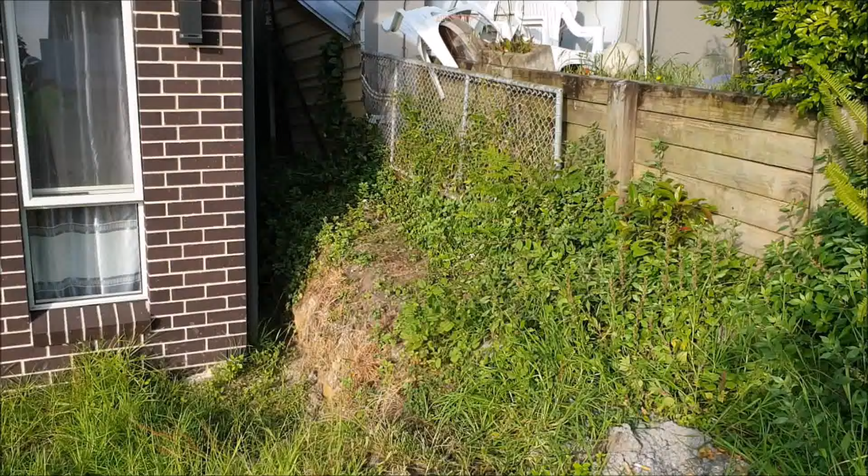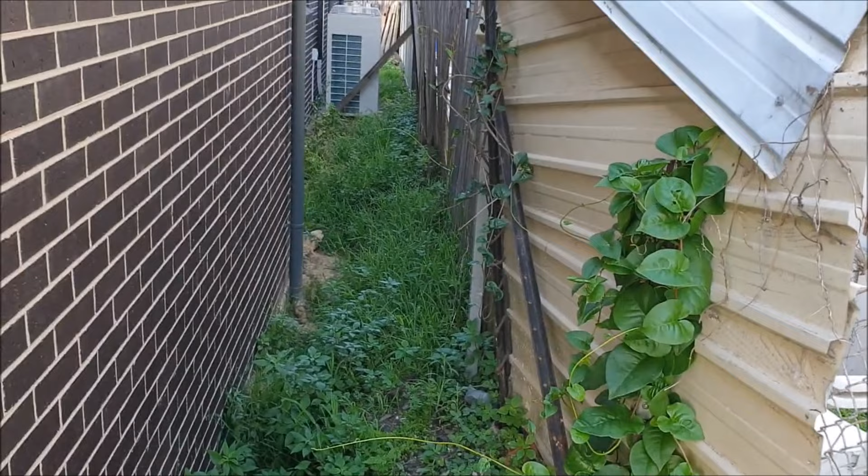Good morning, guys. Today I want to show you how we build Besser blocks, a concrete block retaining wall in that area. We need to excavate this part and move the soil, and the wall is 400 from the boundary to the house to stop the soil from the neighbor's house. This house is lower than the neighbor's, and we need to retain the soil behind the retaining wall. The retaining wall will start from 4 course in that area, then step down to 3, 2 and 1 at the end.

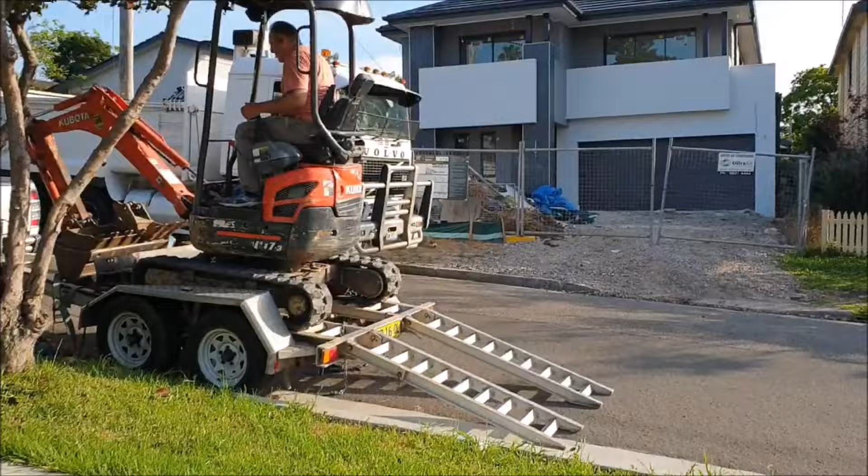First job, cleaning and excavation. We bring the small excavator, which can access the side of the house, and then we dig and excavate the footing, and check it with the laser level following the plan. I'll show you how we fix it and build it.

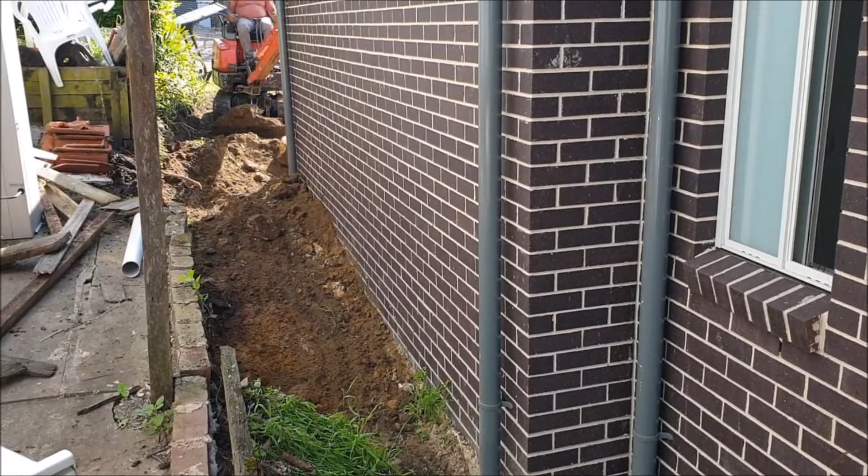So we're removing the existing fence. The old timber fence is all damaged. We remove that, and also continue excavating along the boundary line. I'll show you the plan for the footing. We have to follow the plan because the council certifier comes to check, in the next step, how we fix the steel work for the concrete and how the footing is. If he's okay with the plan, we continue to put the concrete on top.

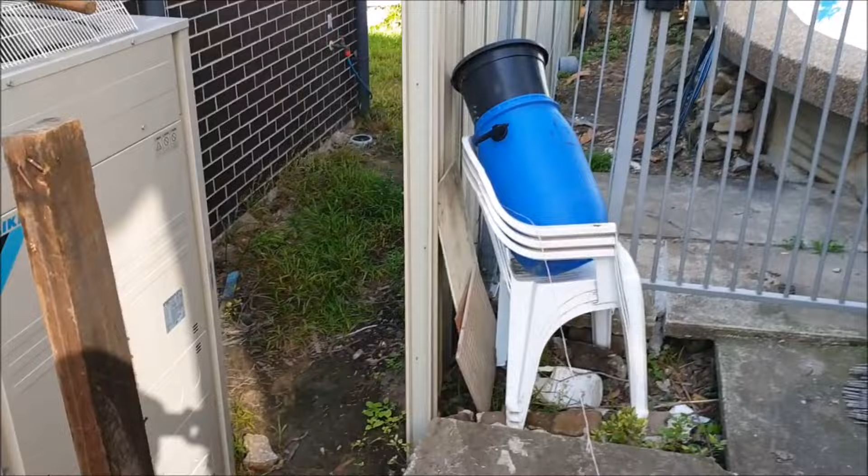This is the excavation part.

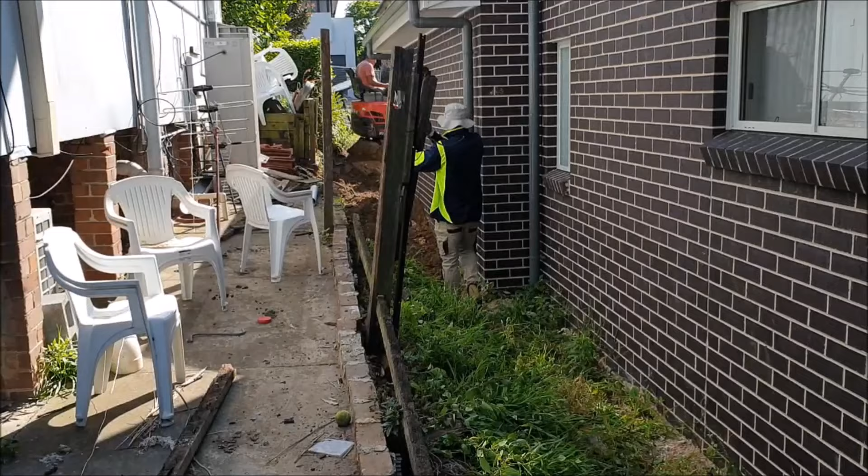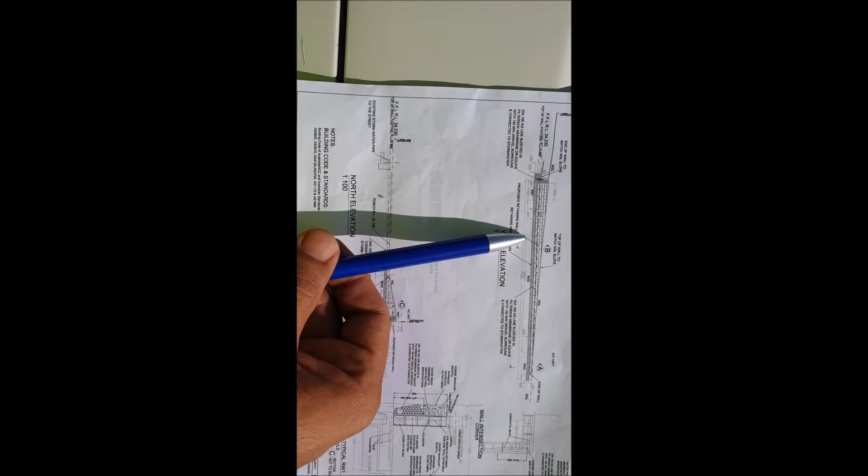So as you can see on the plan, this is the retaining wall: 1.7 meters, that's 4 course, then 1.28 meters, that's 3 course, and then 1 course at the end, the whole 17 meters long.

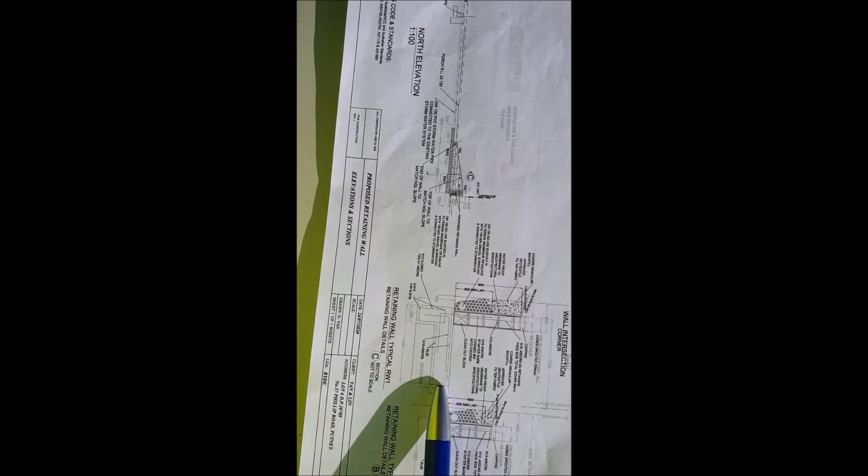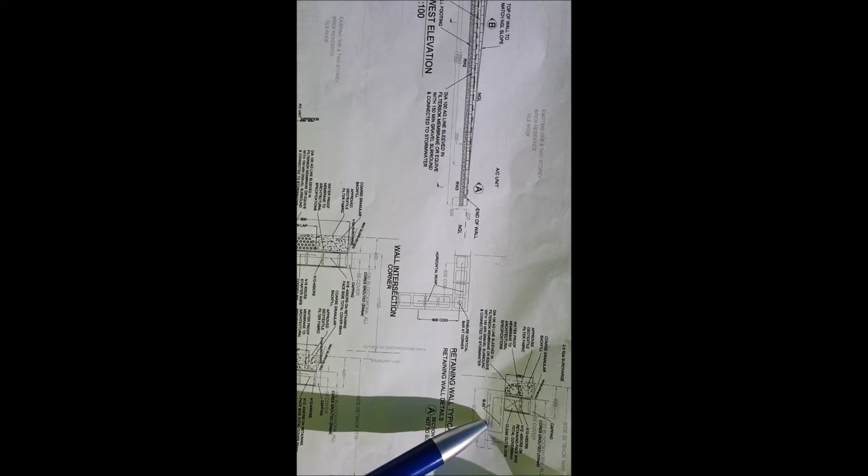We try to follow the detail of the wall. This is an engineering detail for the retaining wall, and we have to follow the exact details of this.

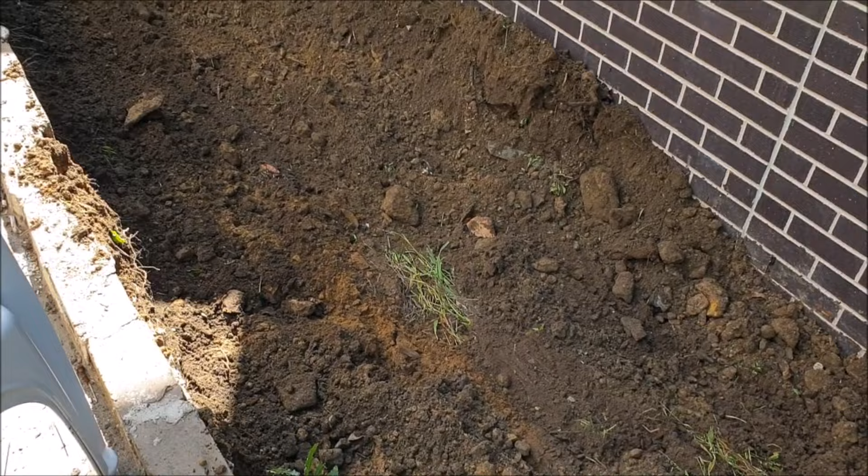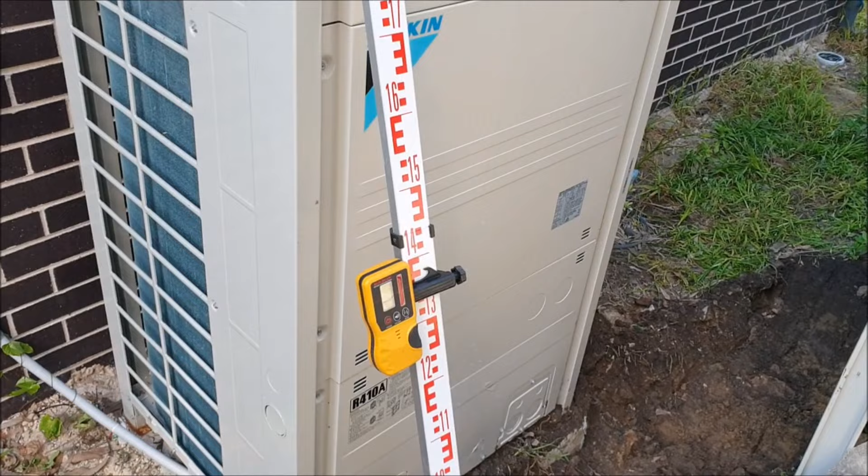So we excavate the existing soil, and now we're setting the footing, and we check the level of the concrete and the footing with the laser level. We set the laser level, as you can see it's rotary and shows the level by the laser.

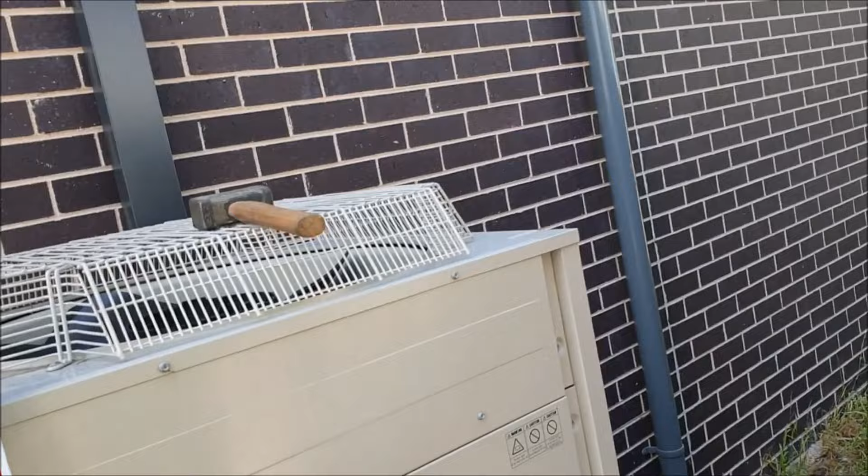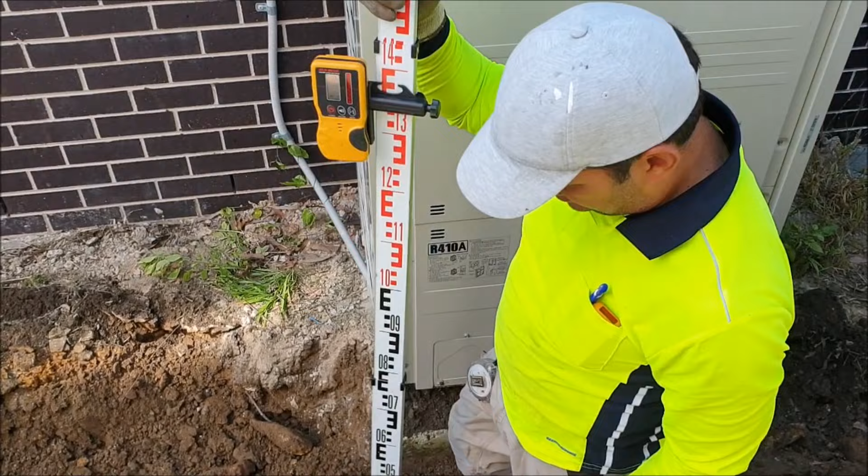Now Tom will help show you how it works. We set the level and turn it on. Now this is the dip - if you can see the arrow, it's going down. And now this is the level of the footing, you can see it's showing there.

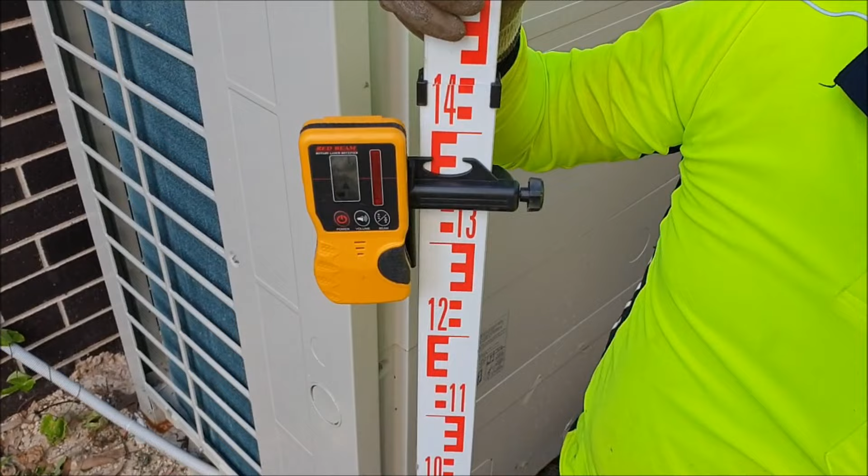We have to follow that with the excavator all through the footing. We check every point while the excavator is working, and that gives us a perfect result at the finished excavation. Yeah, that's good, and we have to follow that.

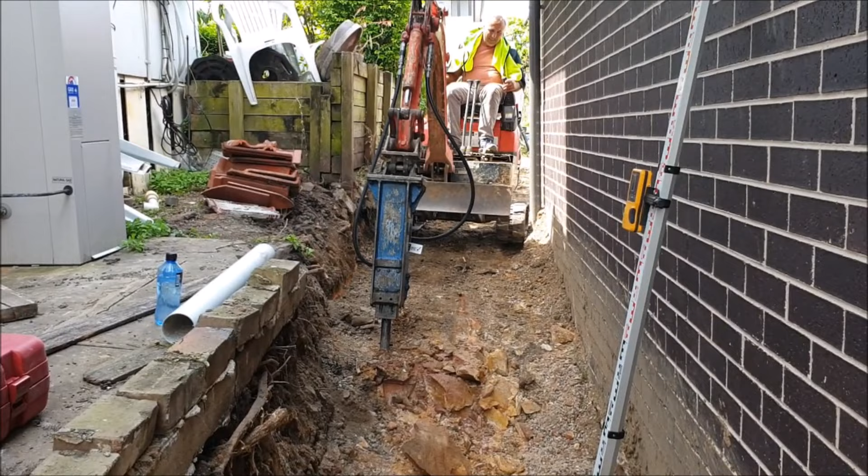Remove the soil, then check it, verify the laser level. Now we find rock in the footing area, and we have to verify with the rock hammer, attach it to the excavator, and hammer the rock for the worker.

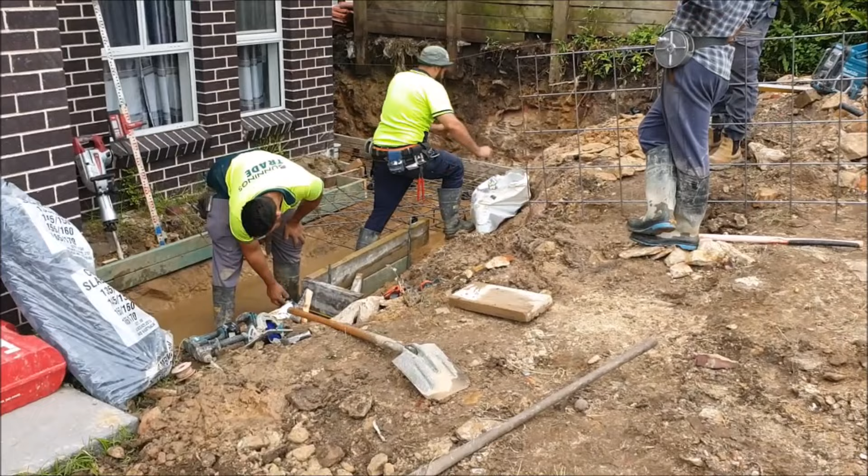So today we're coming to fix the formwork and steel works, to set it up.

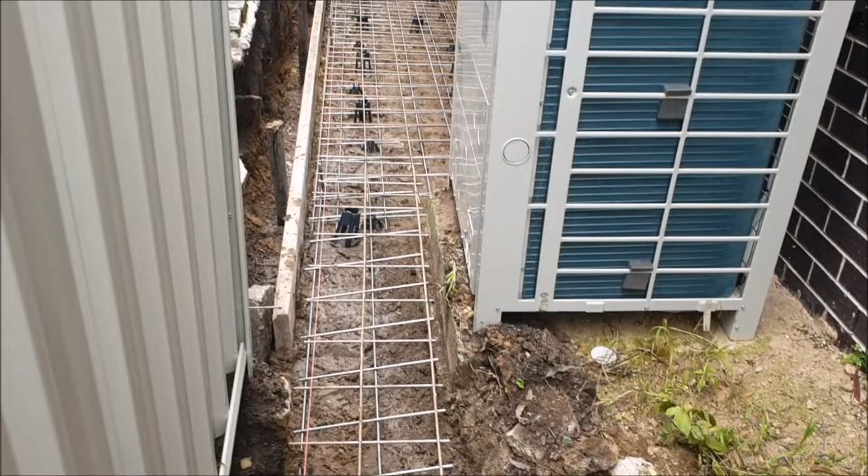So now we set the line to fix the steel bar for the blocks. As you can see, the steel mesh sits on the plastic chair, on the side at the level, and then I'm going there to show you how that was done.

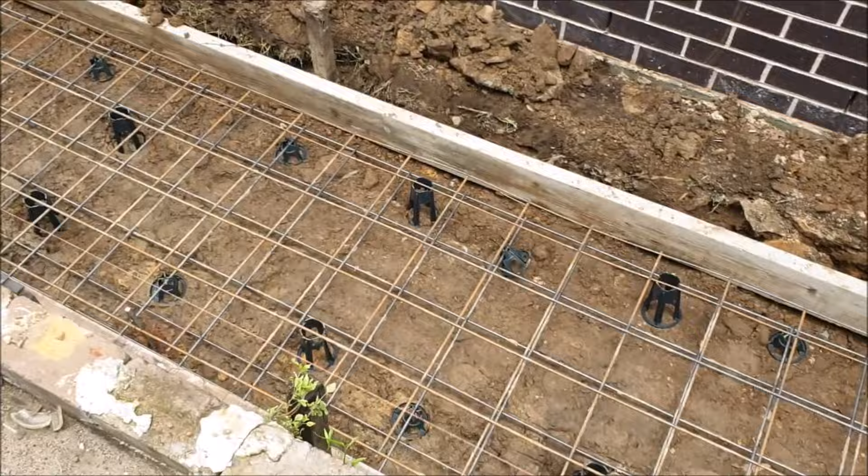This is a two-layer mesh, as the detail shows. The small chair on the bottom and the big one on top. This is a long one and this is a small one, because it's two layers of chairs sitting on top of each other, as shown in the detail.

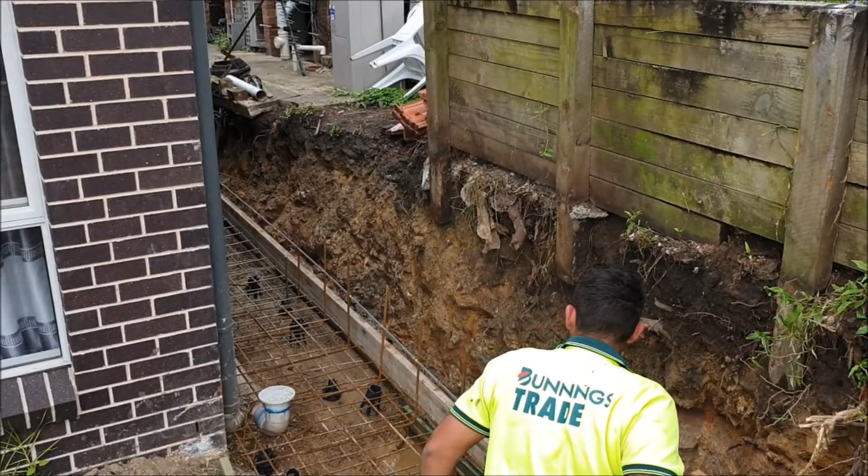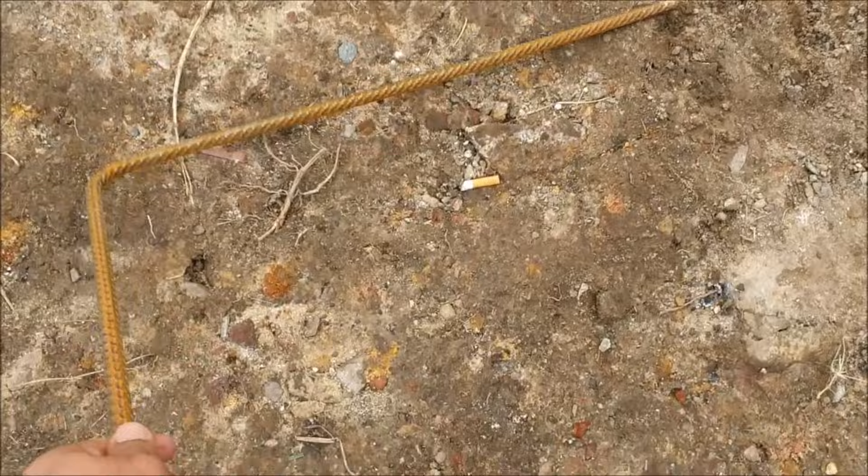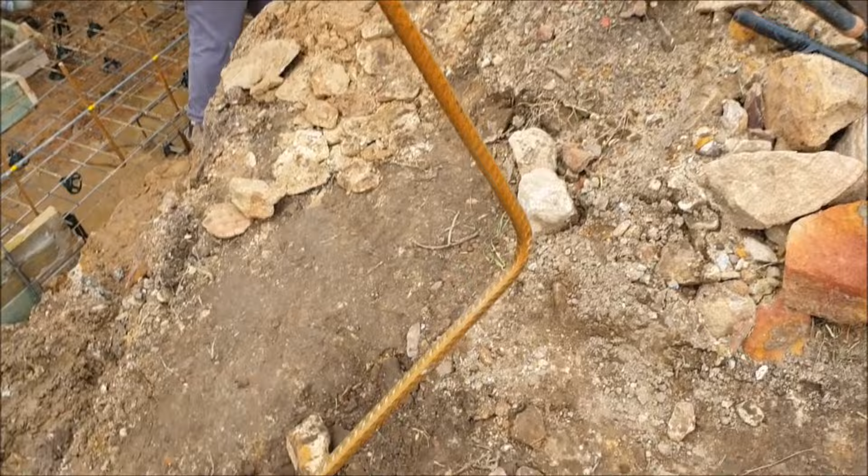Okay, now it's setting the starter bar. This is the shape of the starter bar, N12 steel bar, folded 500 by 500, then connected to the mesh. Then he ties it to the mesh.

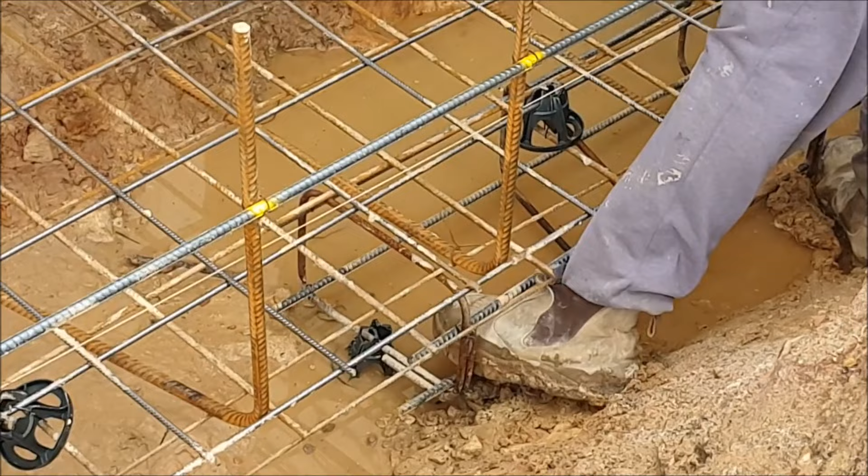Taking a video for next time? No, I'm taking a video. Take a video for YouTube. Yeah, that's it.

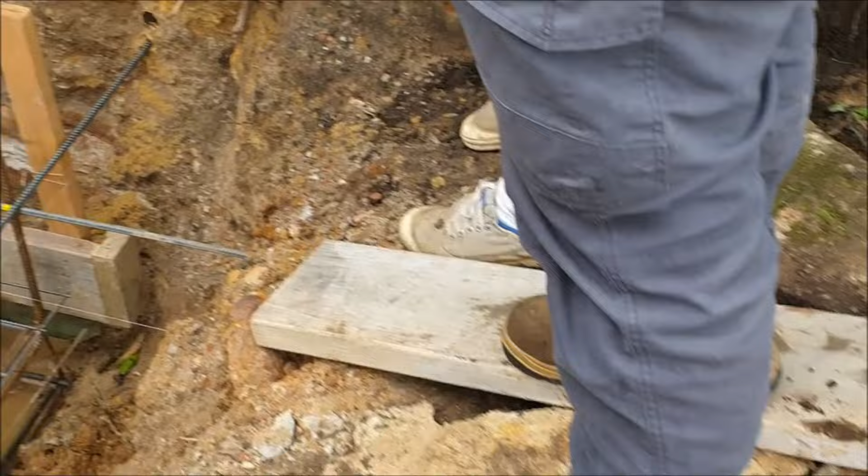See Tom, I told you we can do this. YouTube? You doing YouTube last night, we watched the video, our video? Oh yeah, yeah, you're all right.

So as you can see, the starter bar, actually that's 600 by 600, tied to the bottom mesh, and all in the line, in the angle.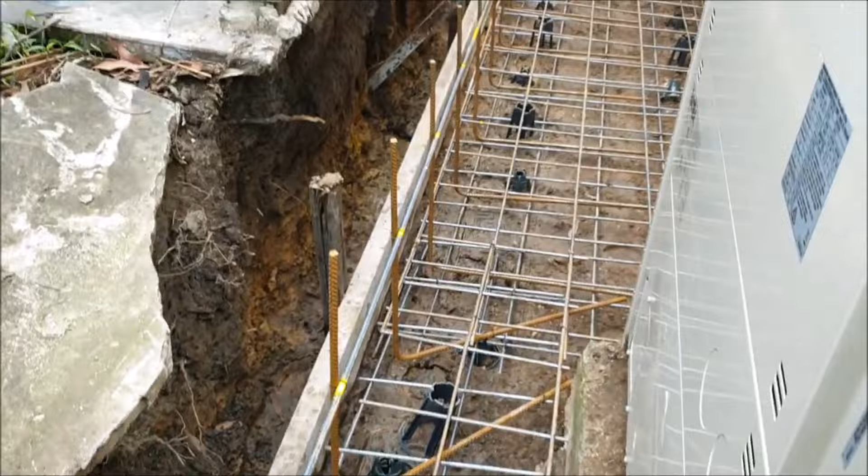And that's the tied wire, how they did it, it goes all through to the end. And the board stops the soil. Tonight it's rainy, so we start to stop the soil from the side, not coming into the formwork.

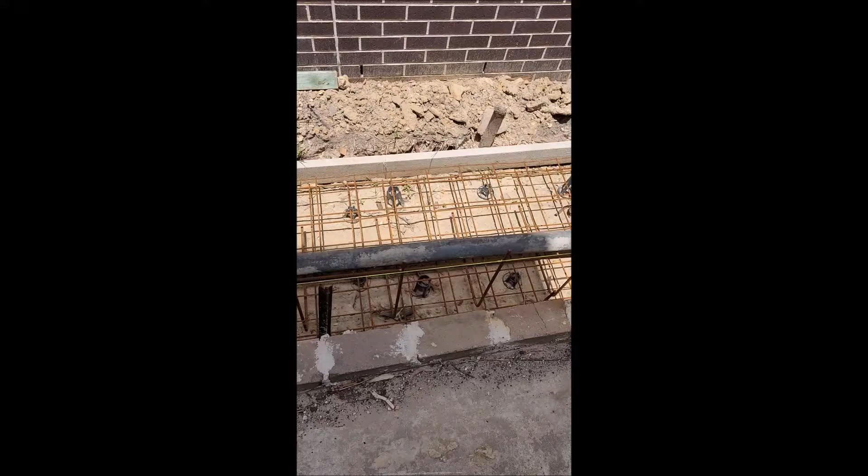So guys, today it's concrete time. For this job we ordered the pump. We need to pump the concrete from the street through the pipe, coming up to there. First we set up the pump and the pipe.

We start from the end, and then we lay concrete for the footing. And I'll show you how it's attached to the mixer by the pump and coming to there.

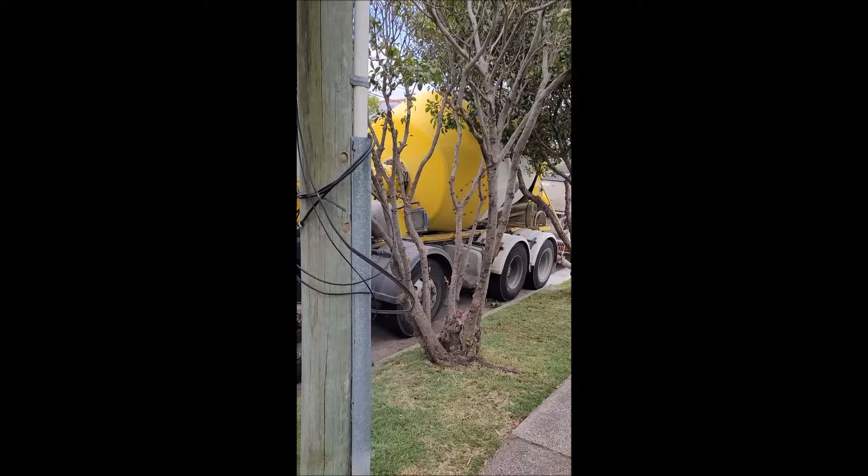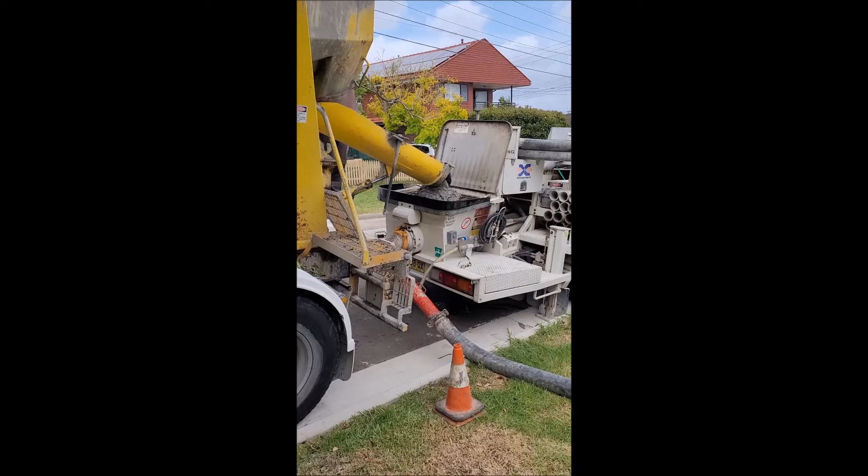So trucks coming, the mixer, bring 5.2 cube of concrete, put it to the pump, and then we'll pump it by the pipe through the job.

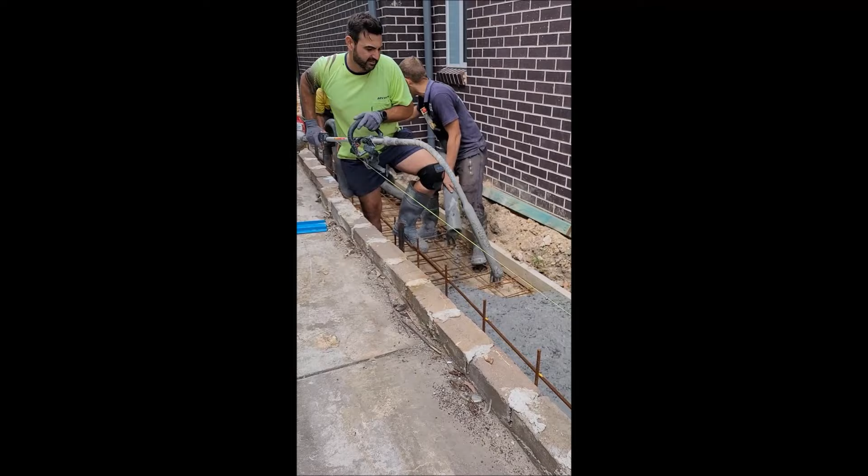We check the finish level, RL for the footing, and then make it finish on top of that by the laser level. Check the level.

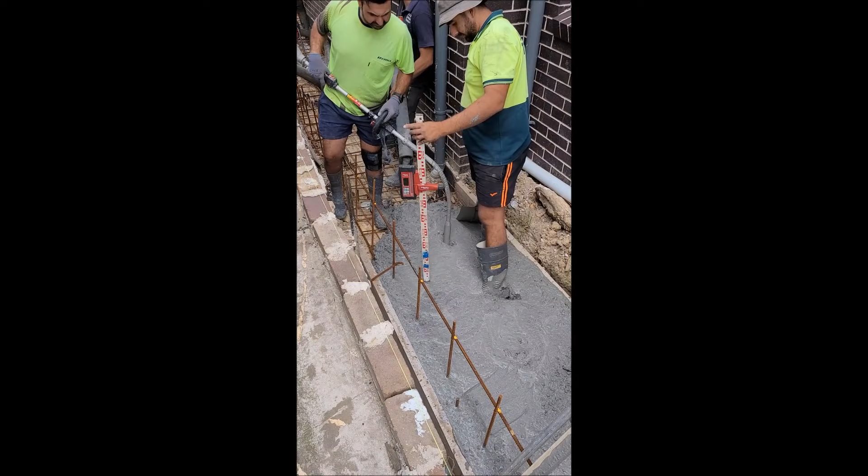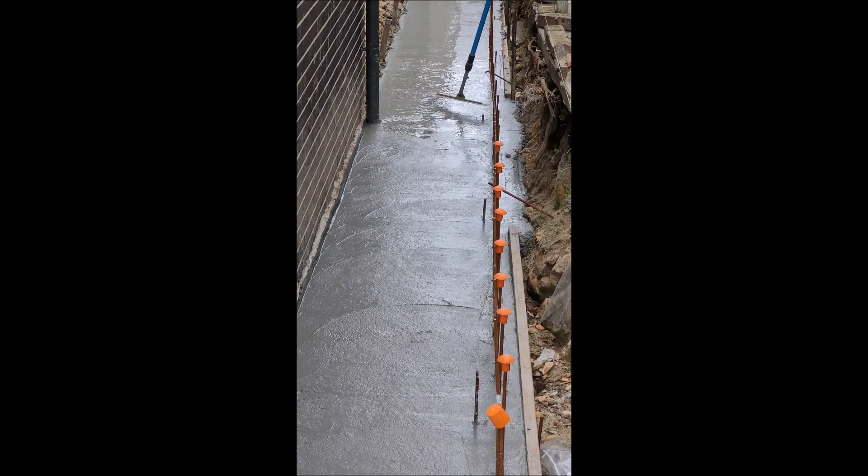And to finish the surface, that's the bull float. Working there to make it a smooth, nice finish.